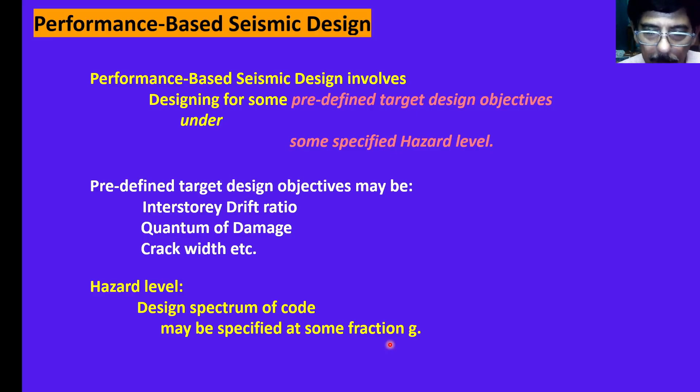So we have the predefined target design objectives which we have to select depending on the nature of the structure, depending on the outcome of the structure we want, and depending on the economy you want to have for the structure. And the hazard level is shown here. It is given in every code, corresponding hazard levels.

So after selecting these two, you design the structure. There will be an engineering process for design that we shall take up gradually in future videos, and you get the structure after designing. Now whether the structure you have designed for your predefined target objectives under the specified hazard level is able to sustain, able to show those objectives under the specified hazard level, that you have to ensure now.

That can be done via the nonlinear analysis of this designed structure. So this structure that you have designed is now to be evaluated. So evaluation is done through nonlinear analysis, pushover analysis and time history analysis, and the results of this will show you whether the target objectives set in the beginning are satisfied or not.

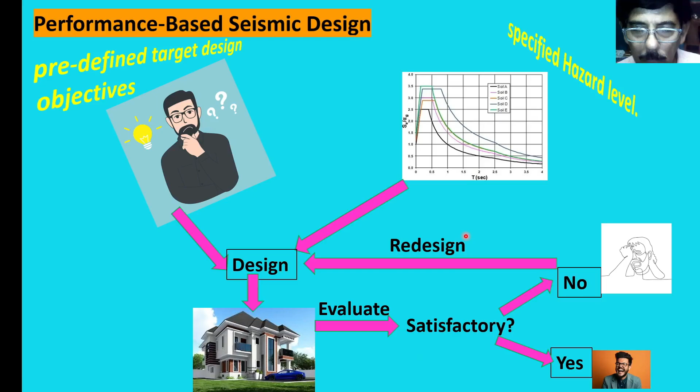While evaluating through the nonlinear procedure, you are setting the hazard level corresponding to the specified hazard level you have taken in the beginning. So if it is satisfactory, then you may stop. If it is not satisfactory, you have to redesign it with some modifications, and again get the structure, evaluate it again and see whether it is satisfactory. So this is the outline of the design in the PBSD.

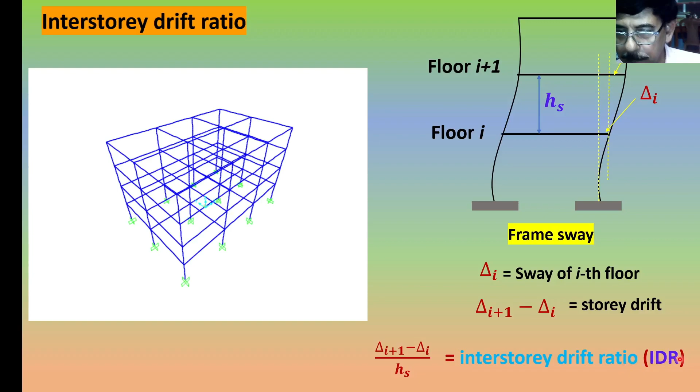You may know that the discomfort that one will feel is not with respect to the ground displacement delta i plus 1, but with respect to the relative displacement between the floor above and floor below, that is the story drift delta i plus 1 minus delta i. Now if I divide this value of the story drift by the height of story hs, then the result is called the interstory drift ratio, IDR. Now this IDR can be expressed in other ways also.

So if the height is hs and the angle subtended here is theta for the story drift delta i plus 1 minus delta i, then delta i plus 1 minus delta i divided by hs is the IDR, which is nothing but the tangent of the angle here, and because these angles are small, I can say this is equal to theta also. So IDR can be expressed in terms of angle in radian, and this can be expressed also in percentage. So suppose we consider a 2% drift, it indicates 0.02 radian angle is the drift we are allowing between the two adjacent floors.

So you can also write it as a ratio, because this IDR is a ratio, a ratio of 0.02. So that is what is interstory drift ratio, IDR. So there will be IDR values between each adjacent floors. If there is a 10-story building, then there will be 10 values of the IDR, and these values will be changing at every instant of time in the dynamic analysis of the structure. So later you can plot this, and whatever the maximum drift you get, that is the maximum IDR of the building.

So why do we study the IDR? What is the importance of the IDR? IDR is important because, as I said, the discomfort that you feel is based on the drift between the adjacent floors and the height. Furthermore, if you have mounted some equipment, say in a hospital or some laboratory, vertically mounted in the wall, then the top of the equipment will be moving in a different magnitude than the bottom of the equipment. As such, the effect of drift will be coming on the equipment and the equipment may get damaged.

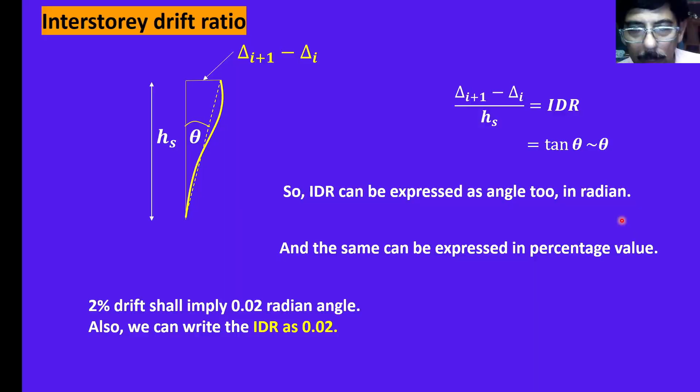Now we take up the performance levels of structures. So performance levels mean a damage state of the structural element or a structure.

So each of these damages is a kind of limit state. We have seen the limit state design in steel structures and concrete structures. There the limit states are qualitative in nature or of particular types only: limit state of collapse, limit state of serviceability, etc. But here the limit states are with respect to some deformation, and the amount of deformation also will matter. The amount of plastic deformation will designate the structural performance levels, either high level performance, medium level performance, or low level performance.

We have taken up a curve here. This curve is the force deformation response of a structure or a structural element. In the beginning the response is elastic. It remains elastic up to the end of the elastic limit, and the maximum elastic deformation is also equal to the yield deformation, after which it yields. So this delta y is the yield deformation where yield starts. On the other way, it can also be said as the maximum elastic deformation.

Now if I take any point A on this response curve, we have the total deformation from the origin up to here, and this deformation consists of the elastic deformation and the plastic deformation. Delta A, total deformation up to the point A, is equal to elastic delta y plus plastic delta PA. Similarly with the point B, delta B equals delta y plus delta PB. Delta PB is from here to here, plastic. So the amount of plasticity is more at the point B than at the point A, or the point B has suffered more damage than the point A.

Performance levels mean a damage state of a structural element or structure, and damage is a limit state as we have discussed. So based on the amount of damage it is undergoing, we will give some nomenclature, and those will be the performance levels for the structure and structural elements. The elastic deformation is regainable, that is, once the load is removed it will go back to the original position, so this part is not considered in the nomenclature of the performance levels. Only the plastic part of the deformation will designate the performance levels. High performance levels indicate low plastic range. Low performance level indicates we are accommodating more damage or more plasticity.

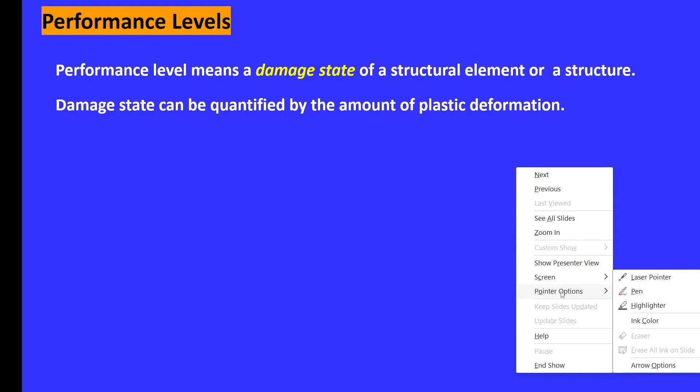Now we study the performance levels. Performance level, cut.

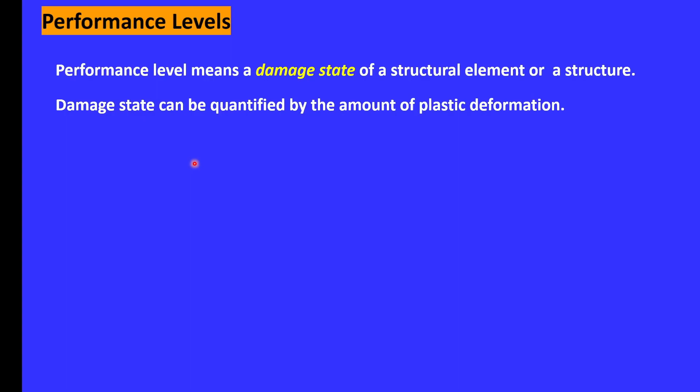Now we take up the performance levels. Performance level means a damage state of a structural element or a structure. Damage state can be quantified by the amount of plastic deformation. So it undergoes plastic deformation, and that amount will tell about the damage state of the element or the structure. Plastic deformation includes plastic displacement delta p, plastic rotation theta p, plastic curvature phi p, plastic strain epsilon p, plastic twisting capital phi p, plastic shearing delta sp, etc. In terms of these plastic deformations, we will be able to quantify the damage state.

Damage state is also a limit state, but in a slightly different context. We have studied the limit state in concrete and steel. There it was collapse prevention limit state, serviceability limit state, etc. But here limit states are within a particular type, say plastic displacement. Then the limit states can be at different displacements. So within a particular category of deformation, you can have several limit states in this concept.

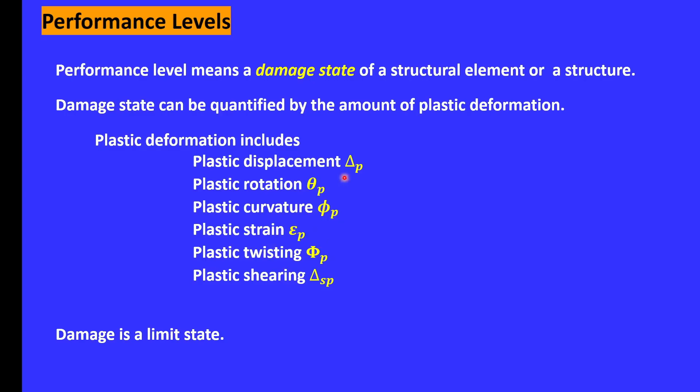We have taken a force deformation behavior for a structural element or a structure. Initially the response is elastic, a straight line. At the end it yields here, and displacement up to this yield point is the elastic displacement called delta y. For our future videos also, remember delta y is the yield displacement as well as the maximum elastic displacement possible at the end of the elastic limit.

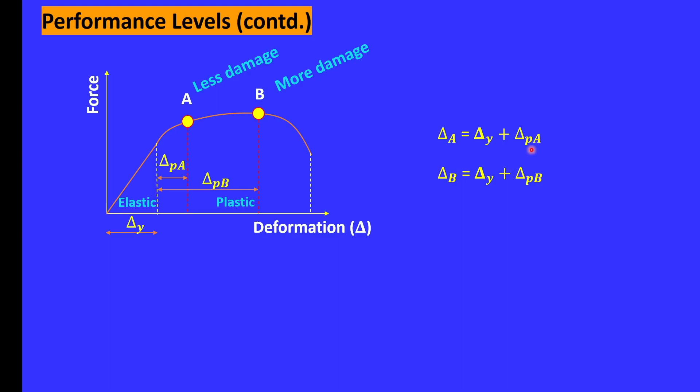Now we consider a point A on the force deformation curve. It has a total deformation from the origin up to this point, out of which delta y is the elastic and delta PA is the plastic part. Similarly, another point B is taken further along the force deformation behavior. Here the elastic is delta y, plastic is delta PB. So the total deformation we write as: delta A equals delta y plus delta PA, and delta B equals delta y plus delta PB.

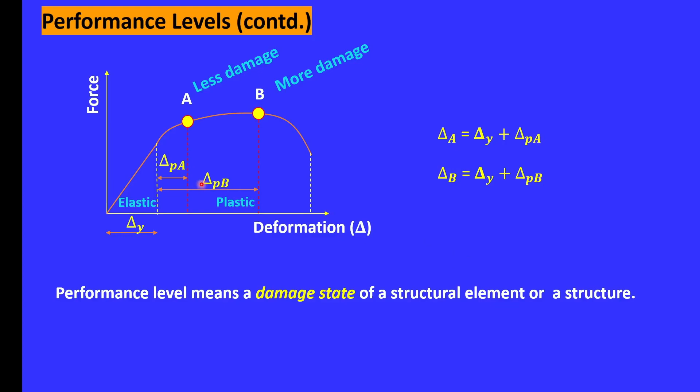Performance levels means a damage state of a structural element or a structure, and as we have said, the damage state will be quantified by the plastic deformation. In this figure, we have taken moment versus rotation. So moment rotation response, say for a beam element, the nature is more or less similar. In the beginning it is elastic, so it is theta y, the yield rotation. Then for the point A it is theta PA, for point B it is theta PB.

As in the previous slide, here also the point B has suffered more damage than the point A, because the plastic deformation amount theta PB here is more than theta PA. So here also we can write like this: theta A equal to theta y plus theta PA, and theta B equal to theta y plus theta PB.

Now this total angular deformation at the point is your design drift value, because we have seen the drift can be expressed in terms of angle. So this total deformation at the point A is the design drift for the point A, and the total deformation at the point B is the design drift at the point B. That is, if you want a structure to be designed for say deformation up to point B, then you have to design it for this drift theta D equal to theta B.

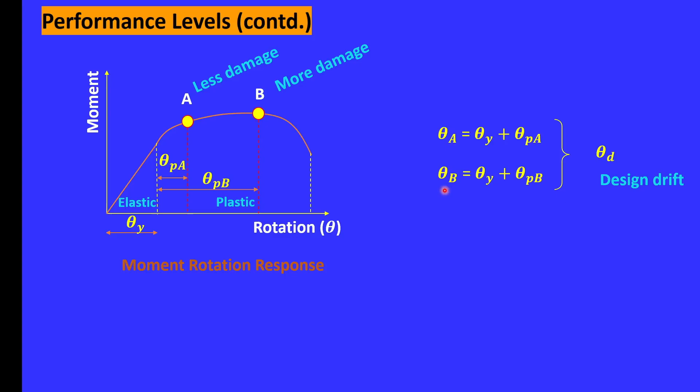We have considered again a response curve. This is called the pushover curve. It is between the roof displacement and the base shear in the building, or even other structures also, the same principle holds good. There roof will mean the top of the structure. So when it is beyond the elastic point, damage has taken place, and we take a point here very near to the elastic point, the damage is less.

This damage state we call as IO, immediate occupancy. What does it mean? It means in a post-earthquake scenario, you can immediately occupy the building without major repair. That's why it is called immediate occupancy performance level. Further away on the pushover curve, where damage is still more, we call it as the life safety point. So performance level is life safety, the damage is medium damage, and further away you have very large scale damage, which is severe damage. It is called the collapse prevention.

So life safety means the life is not threatened. The damage is there, but the damage is not so high that life will be threatened inside the building. Life may be threatened due to falling hazard, due to the collapse of the structural element, so that the structure or a part of the structure becomes unstable. So in life safety, life is not threatened. In collapse prevention, the structure is almost fully damaged. However, it is retaining the capacity to carry the gravity loads, and so it does not collapse. That's why it is called collapse prevention, CP.

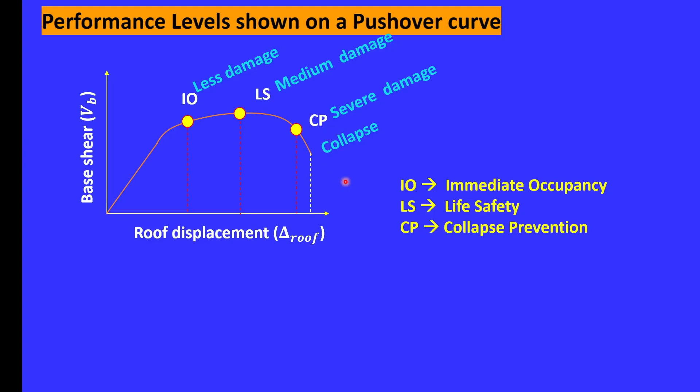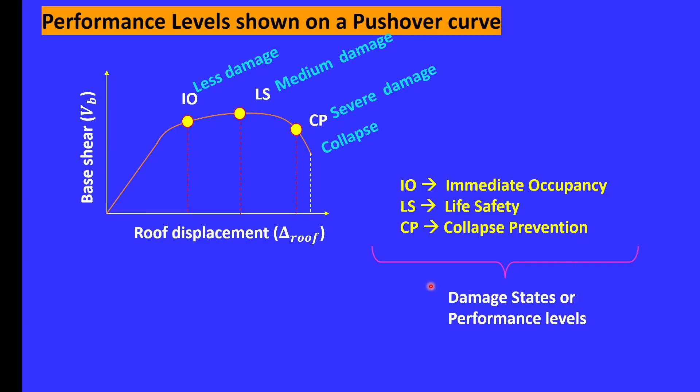So we have mentioned 3 damage states or performance levels: immediate occupancy, life safety, and collapse prevention. Obviously, an immediate occupancy building will be performing much better during earthquake. Damage will be almost negligible. Life safety will be suffering damage but not threatening the life. Collapse prevention will be suffering very large scale damage in structural as well as non-structural components, but it is not falling down, it is not collapsing. So we are putting IO for immediate occupancy, LS for life safety, and CP for collapse prevention performance levels. So these are all damage states or performance levels as we have discussed.